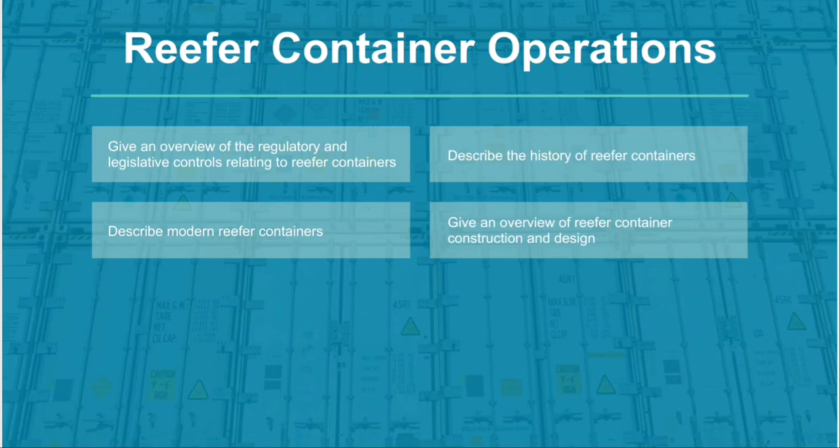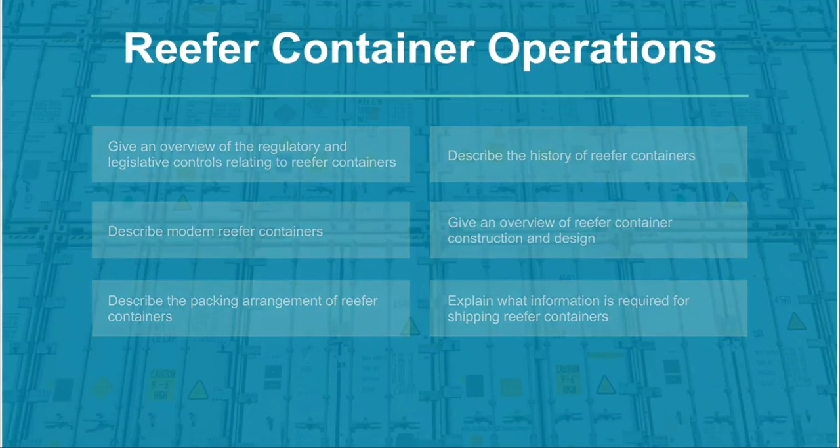This course is designed to give an overview of the regulatory and legislative controls relating to reefer containers, describe the history of reefer containers, describe modern reefer containers, give an overview of reefer container construction and design, describe the packing arrangement of reefer containers, explain what information is required for shipping reefer containers, give an overview of special shipments, describe the pre-acceptance checks, explain how reefer containers should be stowed on board, describe how reefer containers are monitored at sea.

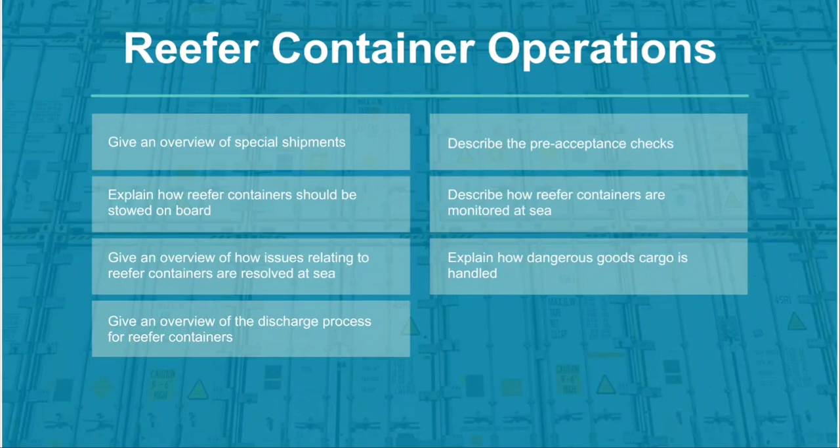Give an overview of how issues relating to reefer containers are resolved at sea, explain how dangerous goods cargo is handled, and give an overview of the discharge process for reefer containers. At the end of this course there is an assessment. These questions are assessed and have a 70% pass mark, so please pay close attention and think carefully about your answers.

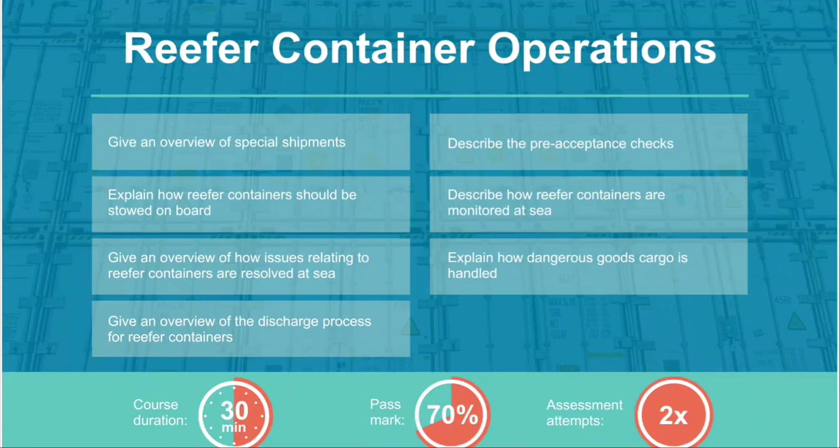Under the Safety of Life at Sea Convention, cargo units, including containers, vehicles, and other movable entities, should be secured on board the ship as per the Cargo Securing Manual, CSM. The CSM was approved by the administration and drawn up to a standard at least equivalent to the relevant guidelines of the International Maritime Organization publication, the Code of Safe Practice for Cargo Stowage and Securing.

In accordance with the International Safety Management Code, each ship should have a procedures manual that details how to safely handle, stow and secure the cargo, including maintenance of equipment, such as reefer plugs and emergency procedures for any fires, pollution or risks from cargo.

The International Maritime Dangerous Goods Code is a detailed set of requirements produced by the IMO covering the transport of packaged dangerous goods by sea. It ensures goods are clearly identifiable, segregated, packaged and transported correctly, and have emergency procedures in case of spillages, fire and medical incidents. Delegates on this course should make themselves familiar with all company procedures and operating manuals for carriage, operation, repairs, breakdown, reporting and spares pertaining to the ships and reefers carried.

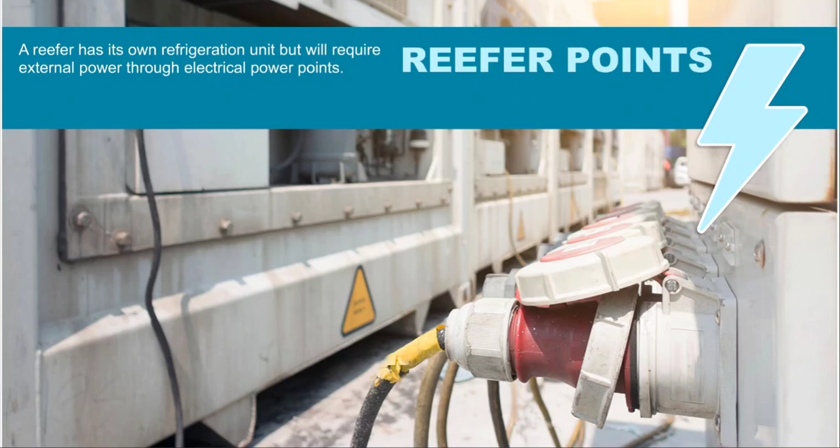A reefer has its own refrigeration unit, but will require external power through electrical power points called reefer points, from a land-based site, a ship or at the quay. During road, rail or trailer transportation, reefers can be powered by transport units or diesel generators.

However, it has not always been easy to transport meat and vegetables. In the early 19th century, ships would use packing ice and salt to ensure that items did not spoil, but it was a difficult task, having to cut ice from frozen lakes in cold areas. As more engineers took an interest in experimenting with long-distance refrigeration and technologies advanced, by the 1960s, insulated container ships were fully developed and cargo units were being shipped worldwide in a standard size that could travel by road or rail.

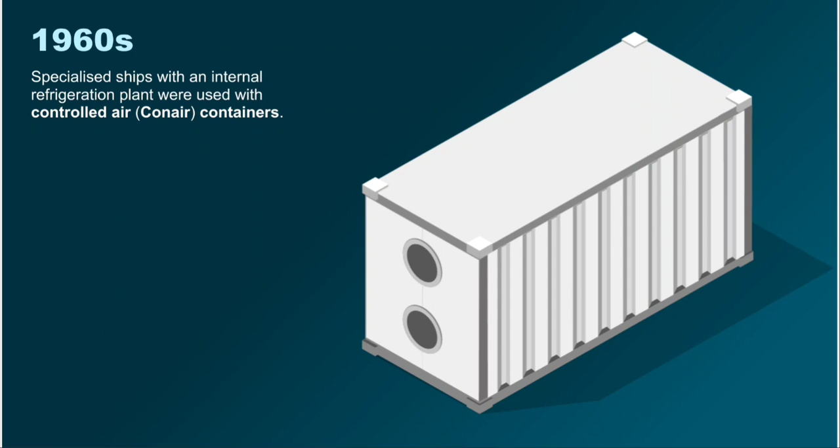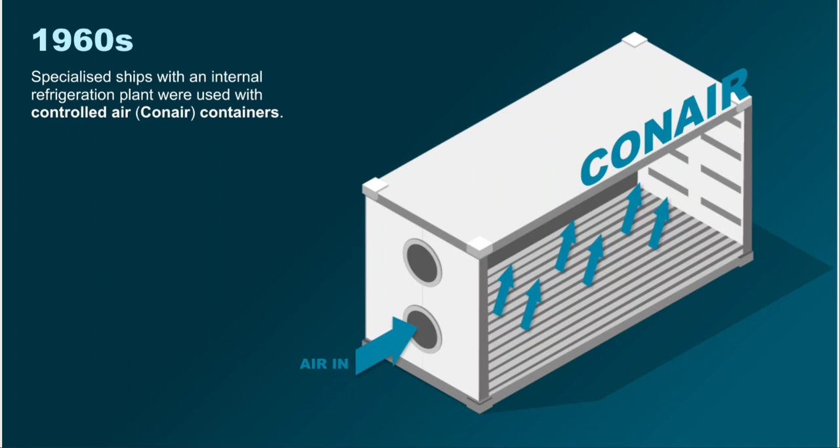In the 1960s, specialized ships with an internal refrigeration plant were used with controlled air, Conair containers stowed under deck so they could be hooked up to the controlled air system. The air within the container was temperature controlled and pumped in through the bottom porthole, circulated around the cargo and then returned via the top porthole for hot air to vent and be recycled again.

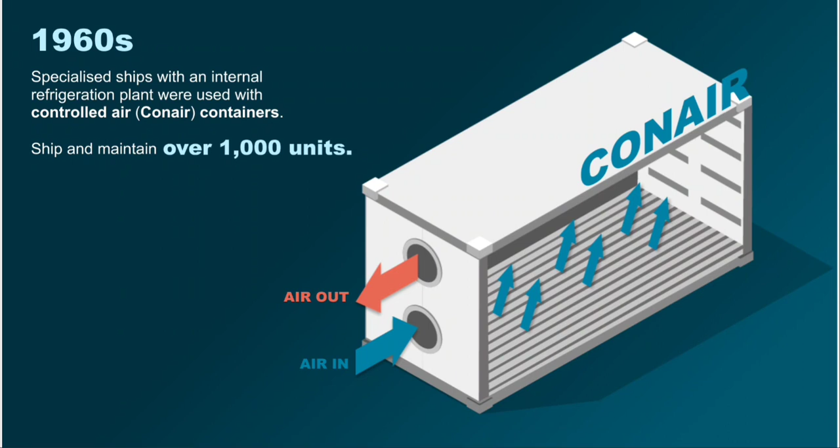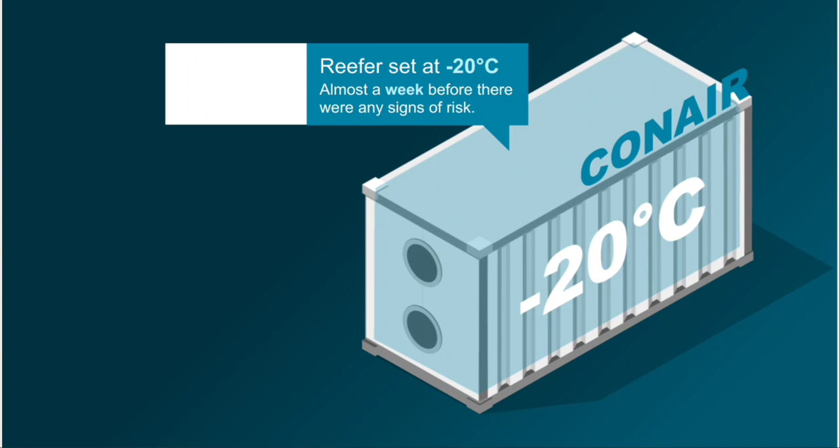Back then, it was possible to ship and maintain the air in over 1,000 units. A designated refrigeration engineer, or a frosty, would look after the plant and monitor the cargo. An advantage of the reefer over an open hold was that a loaded reefer set at -20 degrees Celsius would take almost a week before there were any signs of risk to the contents inside, regardless of the outside temperature, as long as the doors and/or portholes remained closed. Trying to keep an open cargo hold sealed and cooled with a large amount of cargo would perish much quicker.

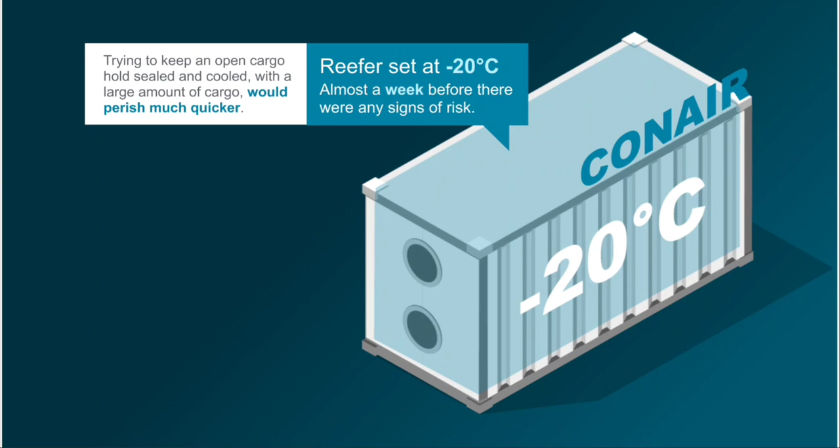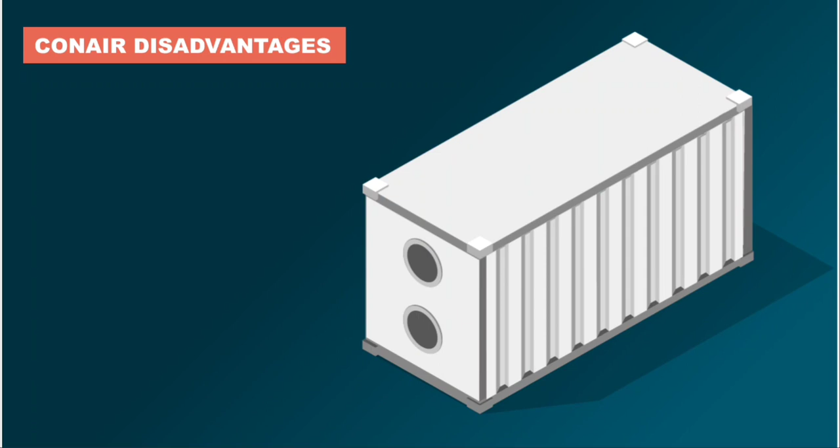On the other hand, there were also some disadvantages with Conair containers. For example, road and rail transport could be difficult as the containers were unable to hook up to a power system like they could on a ship.

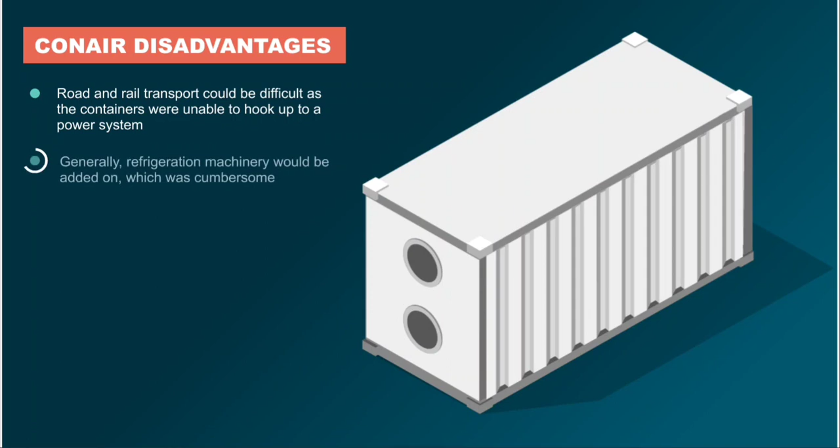Generally, refrigeration machinery would be added on, which was cumbersome and would stick out from the container. The air could not be controlled for each individual container, only in the single stack under deck, which would usually include 8 to 10 containers.

Care had to be taken to couple and uncouple the containers correctly to the holes. In some cases, port operators would mistakenly cause damage by not realizing they were still connected before trying to lift them out, and only 20-foot units were available, which meant limited cargo space for shippers and a higher logistics cost.

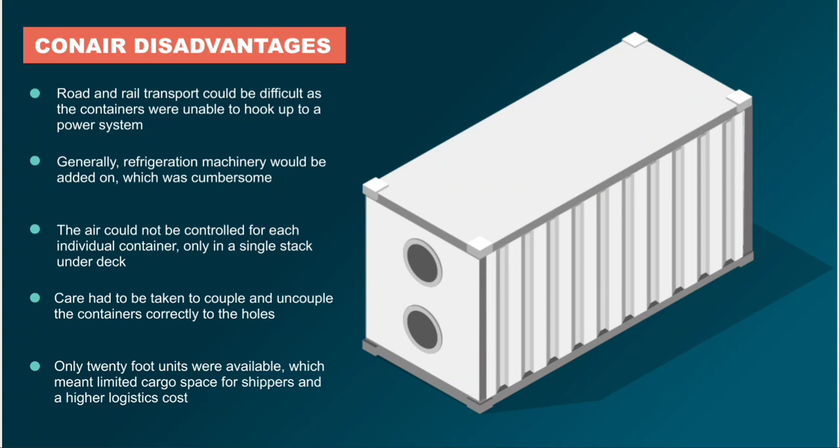By the 1970s, refrigerated containers were built with integrated cooling systems, which were called integral containers or integs, and are still used today. Each unit is operated by electricity that is supplied via a socket from the vessel or vehicle.

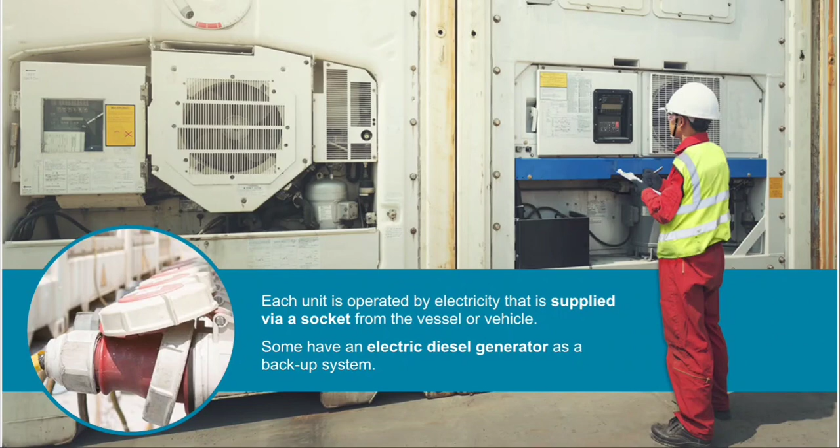Some have an electric diesel generator as a backup system to protect the contents from perishing in the event of power loss. Integs also don't have strict hookup dimensions like the Conair containers, only access points on the transport unit in order to run a cable and plug them in.

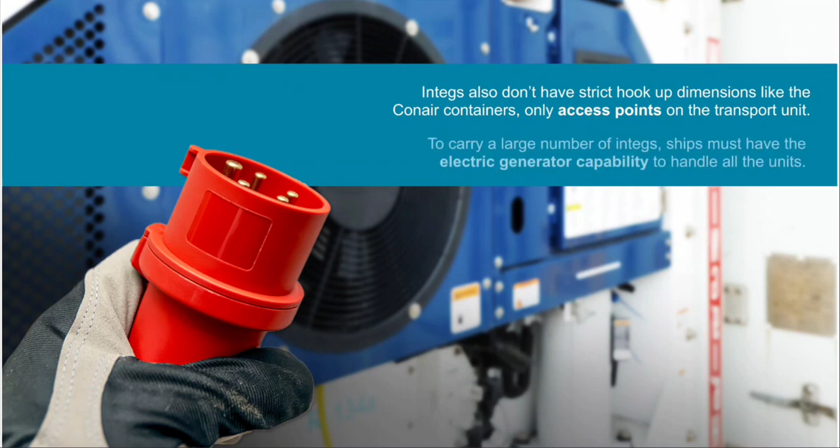To carry a large number of integs, ships must have the electric generator capability to handle all the units. Only a few hundred could be carried, though on modern ships, over 2,000 containers can be transported, on deck as well as under deck.

Disadvantages of integs include: each unit has its own individual refrigeration plant and machinery, which can increase problems as there are numerous plants on board. Each unit must have safe access for plugging and unplugging, monitoring and repairs.

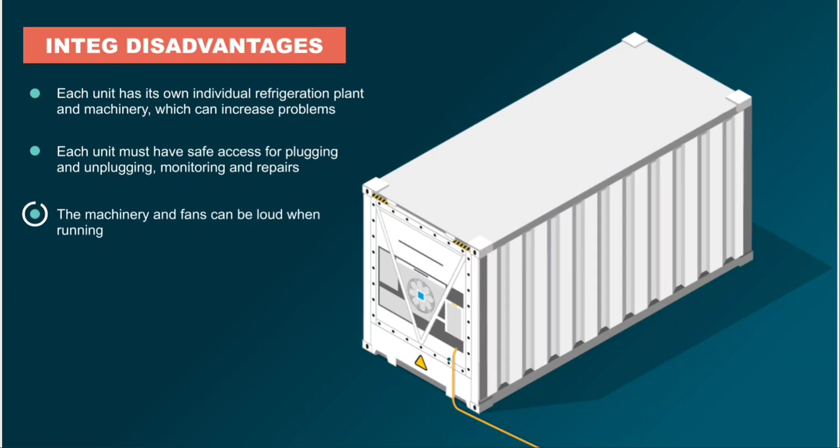The machinery and fans can be loud when running. Integs discharge air and heat. This means that a system of fans and vents is required under the deck to release the air and heat, which can be a hazard.

Large power plants are required on board ships to cope with the number of integs carried, which takes up space, is more costly to install and maintain, consumes more fuel, and therefore increases emissions.

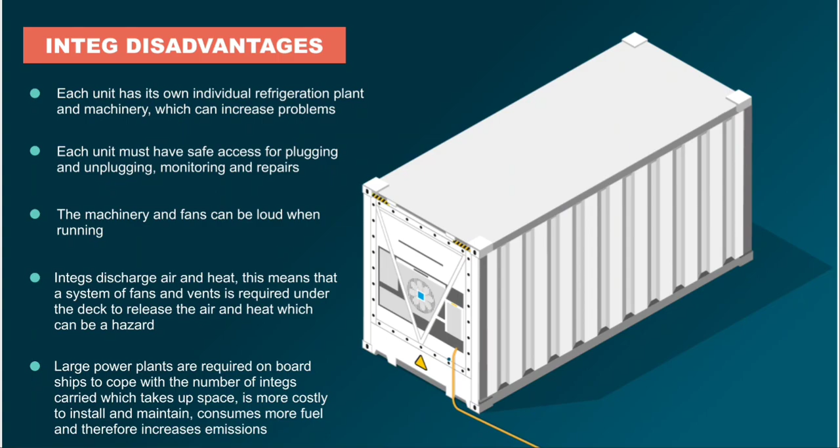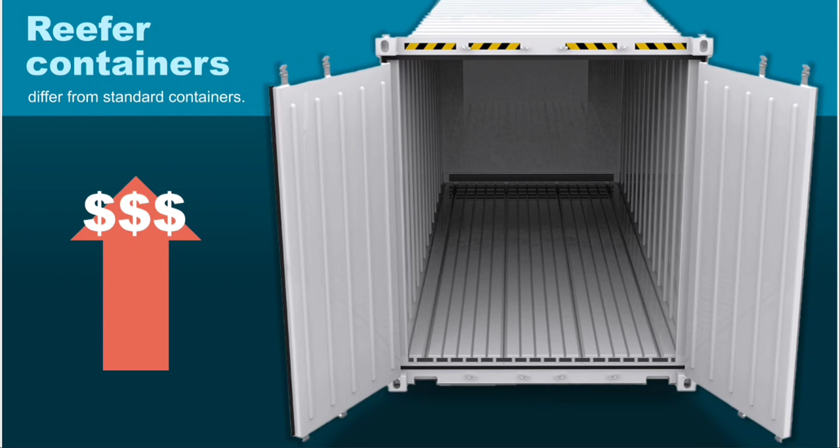Reefer containers differ from standard containers and are more expensive to produce and maintain. Let's take a look at the construction and design of a reefer container.

The polyurethane insulation is 10 to 12 centimeters thick. The temperatures are adjustable between 25 degrees Celsius and -25 degrees Celsius, though some newer types can be set between 35 degrees Celsius and -60 degrees Celsius.

Each unit has a T-grating aluminium floor with an air duct to allow airflow underneath the cargo and has a stainless steel food-grade interior lining. The power connection is 380 to 440 volts at 32 amperes.

The outside color of the container is white to reflect any heat from exterior sources. The containers can be driven by a lift truck or forklift, and the containers have insulated doors and are wind and waterproof to protect from outside conditions.

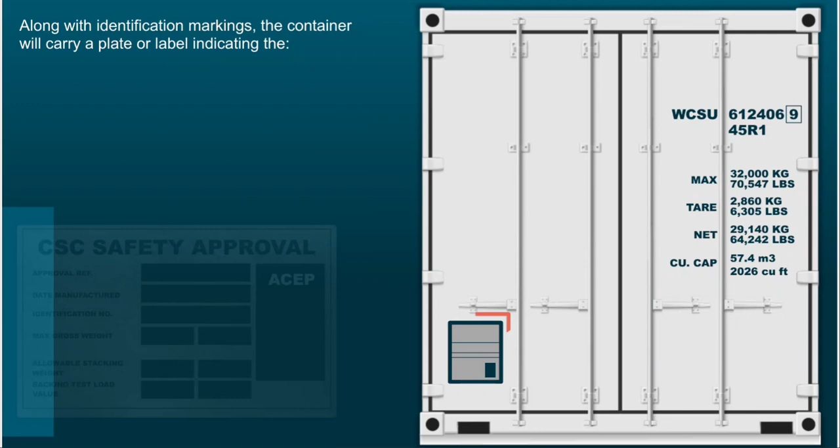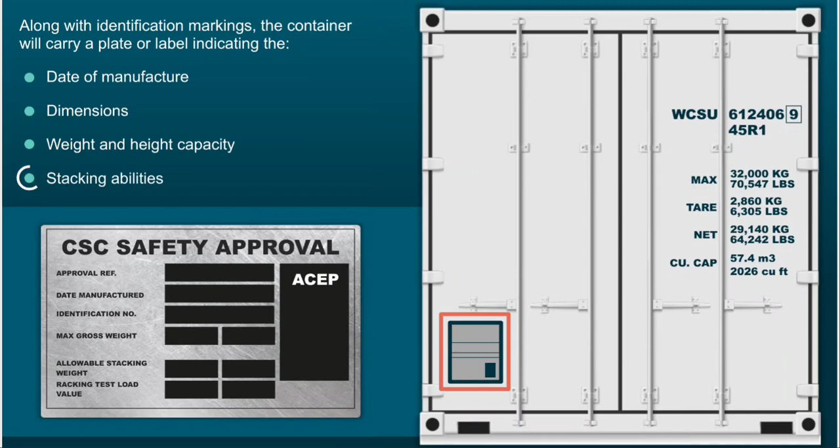Along with identification markings, the container will carry a plate or label indicating the date of manufacture, dimensions, weight and height capacity, and stacking abilities. Also shown is how the container is monitored under the International Convention for Safe Containers and the approved Continuous Examination Program. This ensures the container is always fit for transporting goods and its integrity is maintained to international safety regulations.

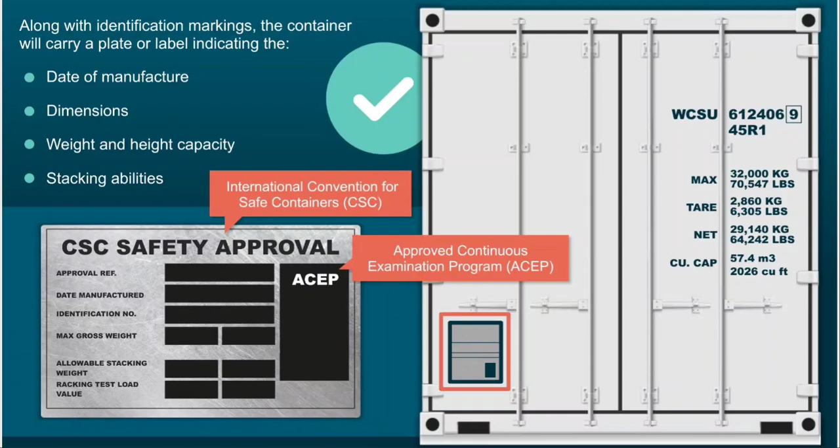The container door security lock seals should be intact on arrival at the final destination. The ship's crew have no involvement in packing the containers. This is done by the shipper of the cargo or their representatives.

When packing, there must be no large gaps between the cargo and the walls or other pieces of cargo. The cargo should be stowed in blocks where possible or secured inside. This will help to ensure that the cargo does not move whilst on passage.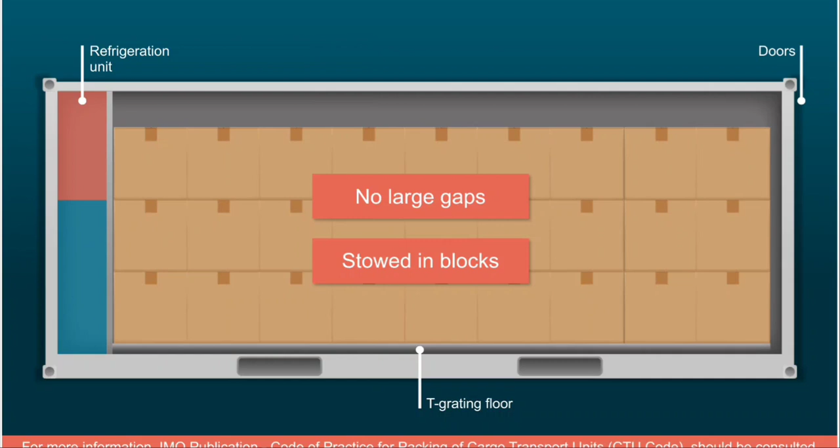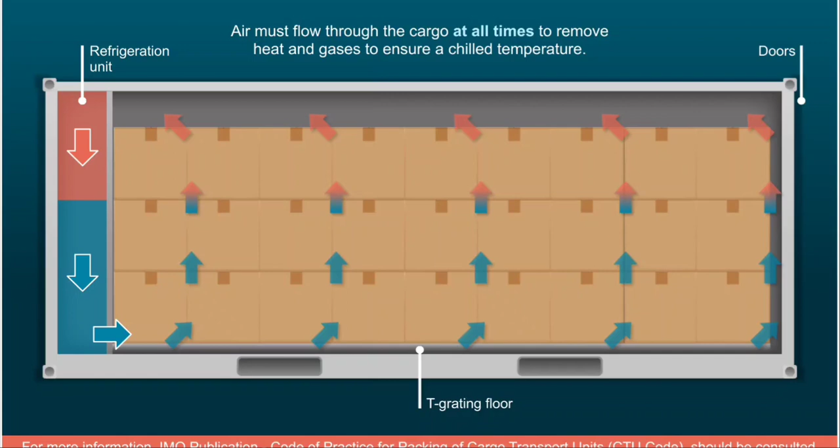Air must flow through the cargo at all times to remove heat and gases to ensure a chilled temperature. Therefore, the transport boxes used should have ventilation. Fresh air ventilation is required for fruits and vegetables, and for frozen goods, air must flow around the cargo at all times.

The ship must be given all the important information about the reefers before loading to ensure that the units are loaded into the correct positions to hook up to power and to provide safe access, and so that empty reefers that don't require power are placed in the right location on board.

As well as the usual loading information for each container, the reefer manifest will be passed on to the ship's crew. The manifest will include important information such as the stowage position, what the container is holding, the set point temperature, information on ventilation, the level of humidity required, and information on how to ripen on the voyage.

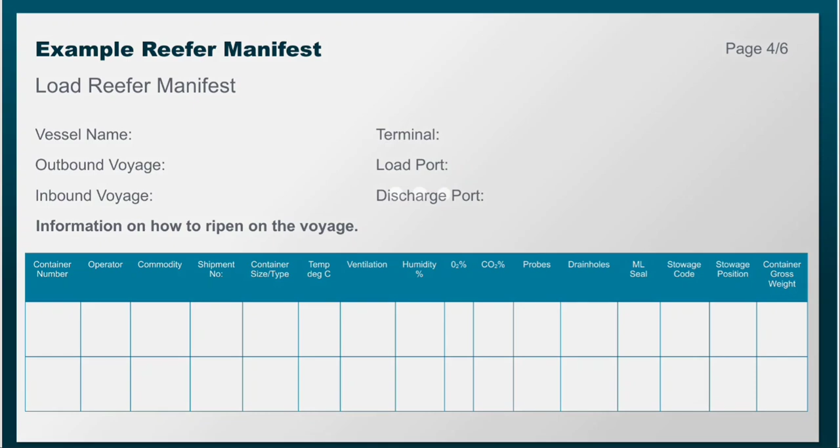Special shipments or high-value reefer cargo must be monitored and maintained on board with greater attention. For example, Häagen-Dazs ice cream can be worth millions of pounds per container, and therefore a loss or damage to such cargo could result in huge insurance claims.

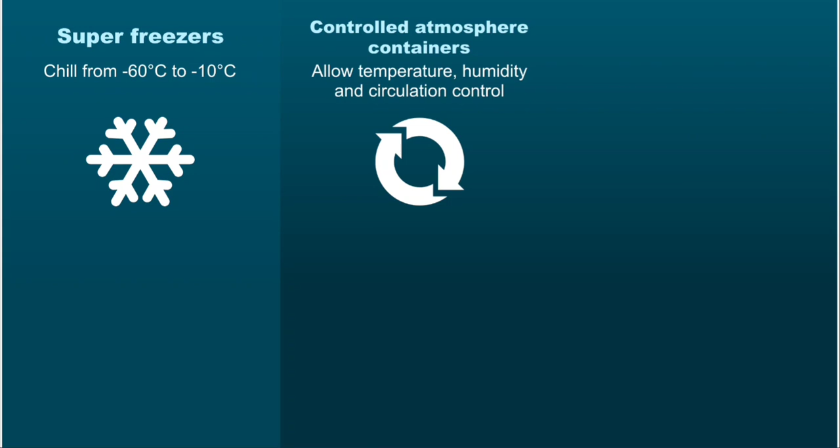These types of special shipments require special containers. For example, superfreezers that chill from -60 degrees Celsius to -10 degrees Celsius, controlled atmosphere containers which allow temperature, humidity and circulation control, and cold treatment containers that keep fruit and vegetables in a healthy state. These containers are generally stowed in specific locations on board for ease of access and removal, if need be. Monitoring and repairing must always be possible by a trained on-board technician. Specific spares and equipment must always be available on board.

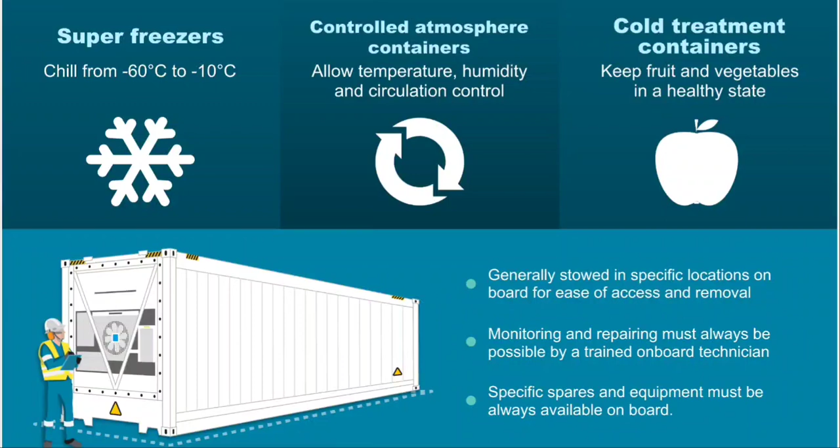Once a reefer container is loaded on board, it should be visually checked. Then it should be plugged into electrical power immediately, especially if the contents should be chilled and the loading port has a hot climate. Visual checks should include the following as a minimum.

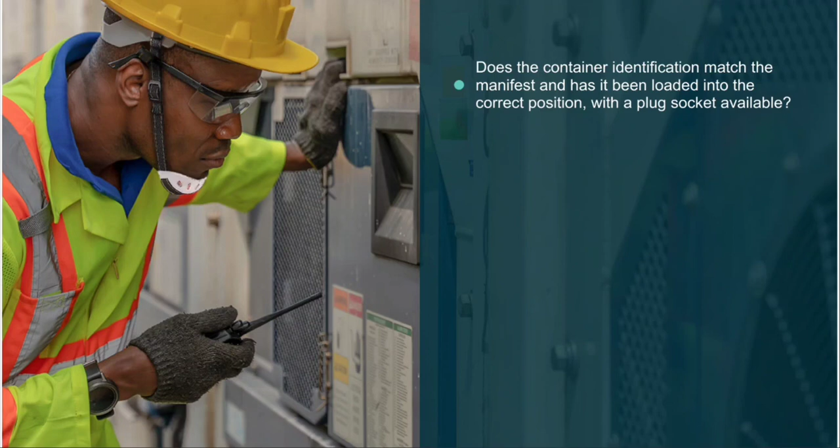Does the container identification match the manifest, and has it been loaded into the correct position with a plug socket available? If on deck, is it secured by the twist locks accordingly? Is there any serious structural damage to the container which may impair the insulation and should be reported? Are the doors, sides and seals intact? Are there any leakages, condensation or strange smells coming from the doors or the refrigeration unit? Is the cable and plug in good condition?

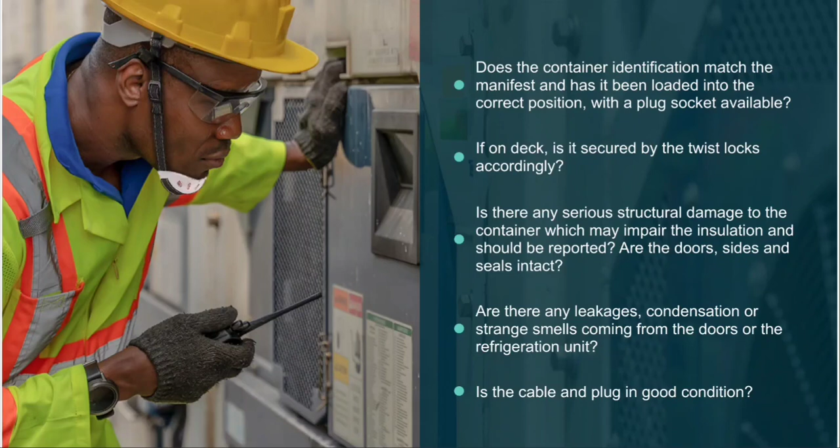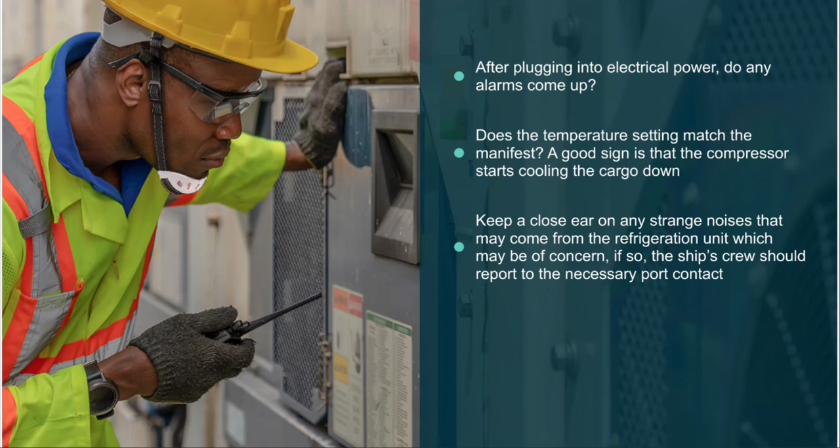After plugging into electrical power, do any alarms come up? Does the temperature setting match the manifest? A good sign is that the compressor starts cooling the cargo down. Keep a close ear on any strange noises that may come from the refrigeration unit which may be of concern. If so, the ship's crew should report to the necessary port contact. Check the ventilation and dehumidification settings, and check the controlled atmosphere and cold treatment settings if applicable.

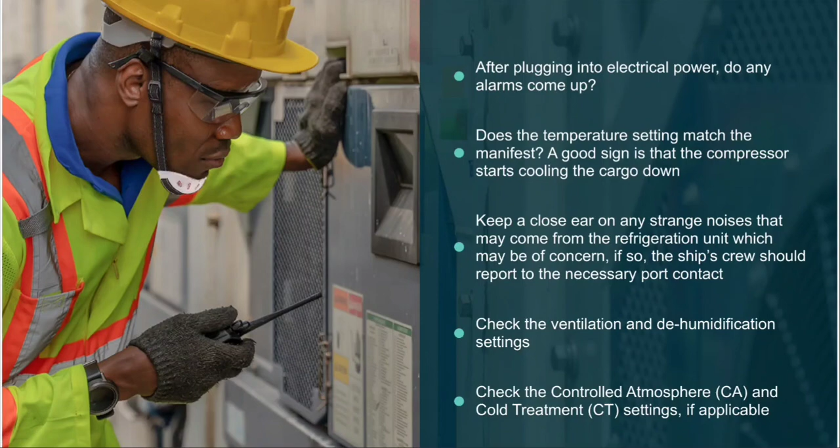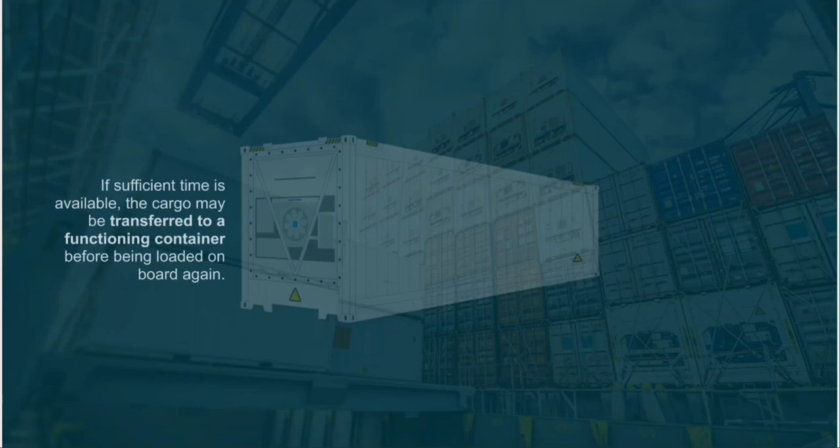Whilst in port, if there are any concerns with reefer containers, this should be reported to the necessary port contact immediately so that a reefer engineer can inspect. If this cannot be done, the container should be removed in order to be repaired on shore. If sufficient time is available, the cargo may be transferred to a functioning container before being loaded on board again.

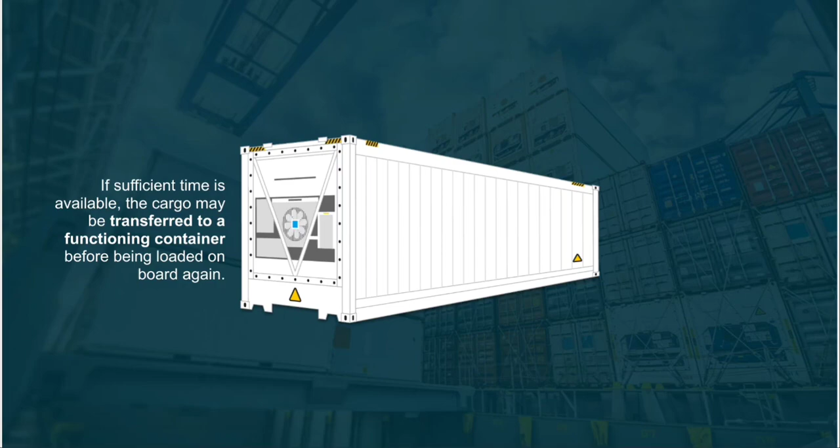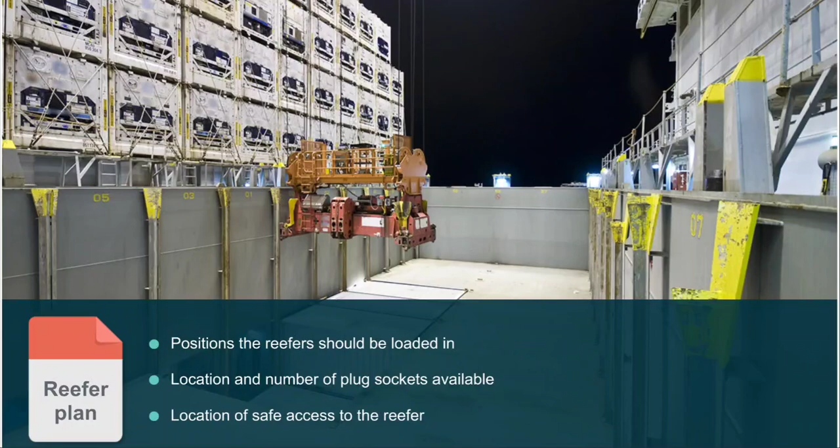Every ship will have a reefer plan showing the positions the reefers should be loaded in, location and number of plug sockets available, and location of safe access to the reefer. Generally, the reefers are loaded on board with the refrigeration machinery facing aft, or towards the back of the ship. This ensures an extra level of protection from the sea and weather, which generally comes from ahead. It also allows any water or condensation to run aft, as this is where the ship drains and bilges are located.

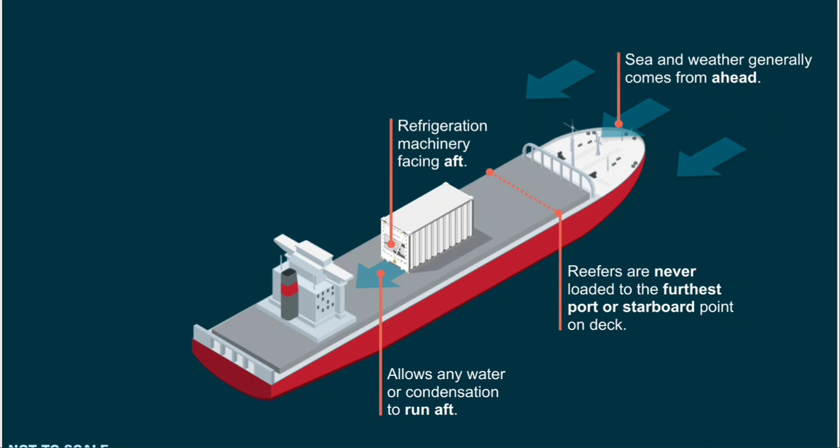The reefers are never loaded to the furthest port or starboard point on deck, as this is too near the ship's side, and therefore puts anyone plugging or unplugging, monitoring or repairing the reefers at risk of falling over the side. On roll-on, roll-off ro-ro ships, the containers will sit on a lorry but are plugged into the ship supply whilst the ship is at sea.

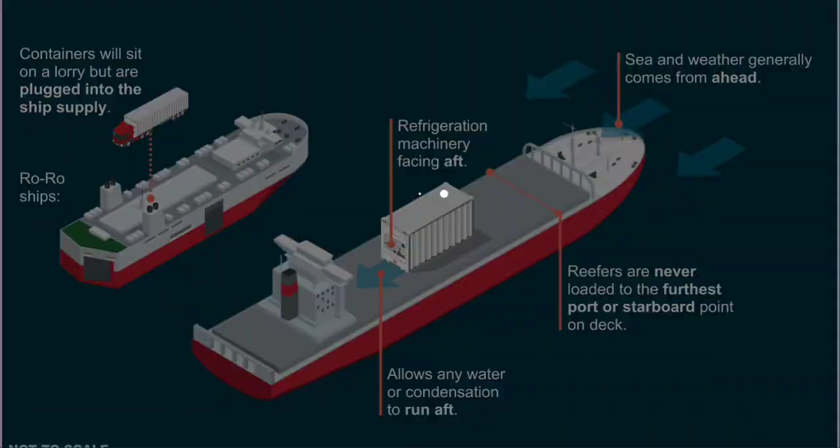Reefer containers can be used to carry dangerous goods under strict conditions. Due to the heat given off by the reefer motors, other containers with dangerous goods inside should not be stored nearby. The heat from the motor could increase the risk of fire, which could result in an even greater risk if it should affect the dangerous good inside.

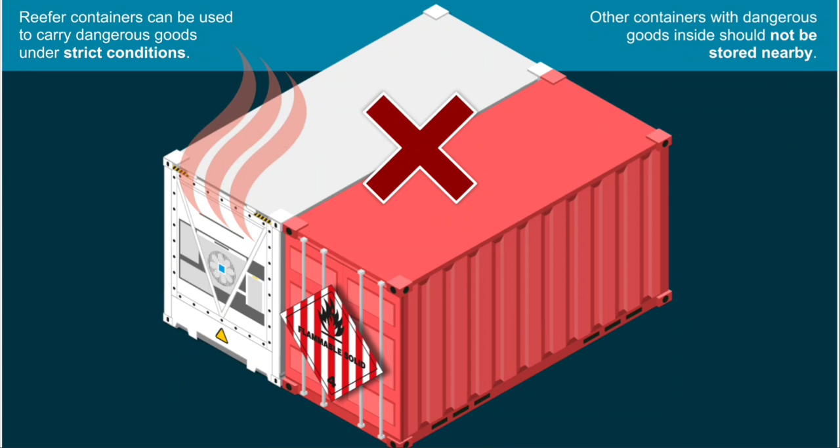If there are two containers with dangerous goods inside that may pose a problem if they were to interact, the containers must be stowed at a suitable distance from each other, as per the International Maritime Dangerous Goods Code. This does not apply to empty reefers, as the motors would not be running.

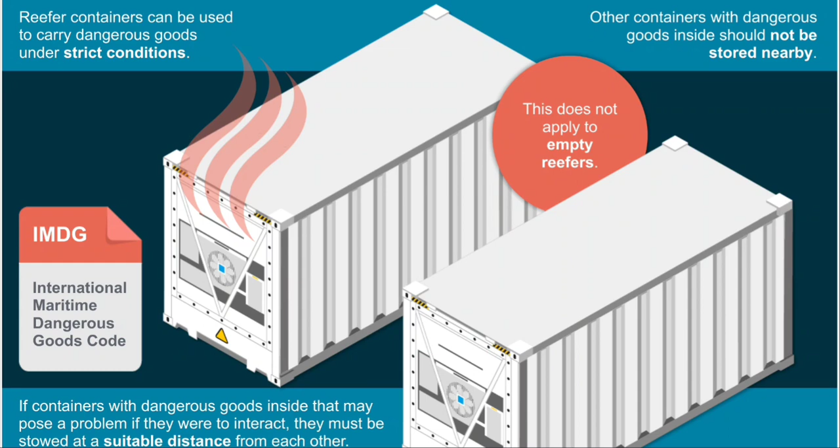Once at sea, the reefer will always be connected to the ship's electrical power and will be continuously monitored by technology via an onboard computer, including alarm presets to warn of any issues, for example if the supply or return temperatures were to get out of range on the reefer panel.

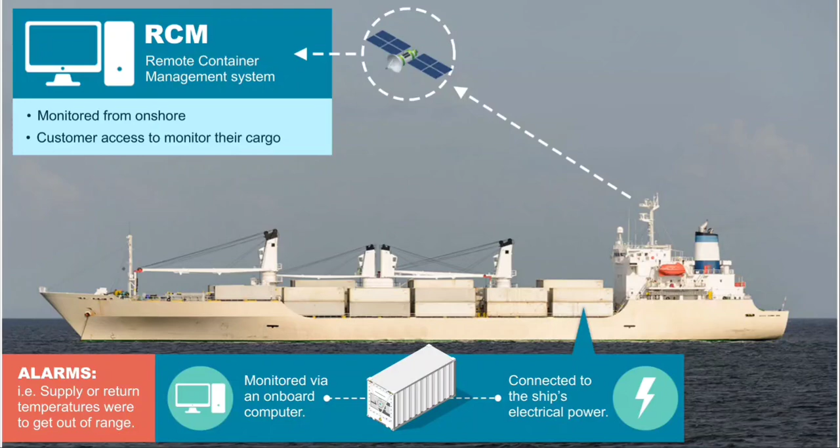Most operators have a remote container management (RCM) system, which is a constant monitoring system on board. The RCM can be monitored from onshore and can be set up to allow customer access to monitor their cargo if required. However, most companies still require a visual check of all reefers on board once or twice per day to ensure there are no visual or mechanical concerns.

The visual checks are recorded in a log. Checks may increase up to 4 times a day for high-value cargo.

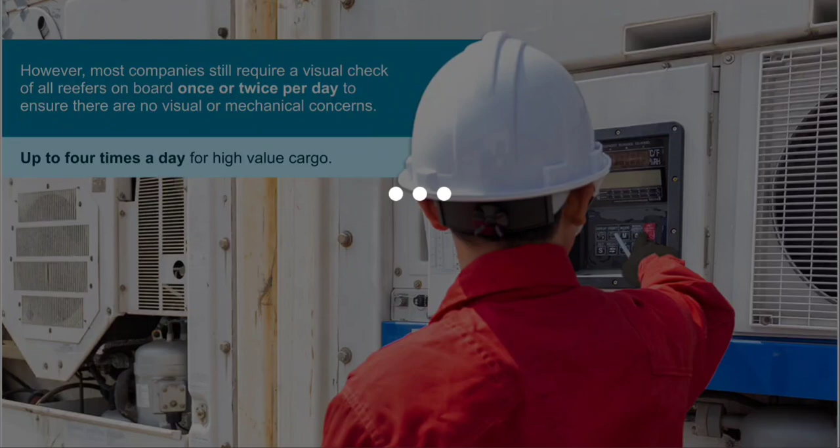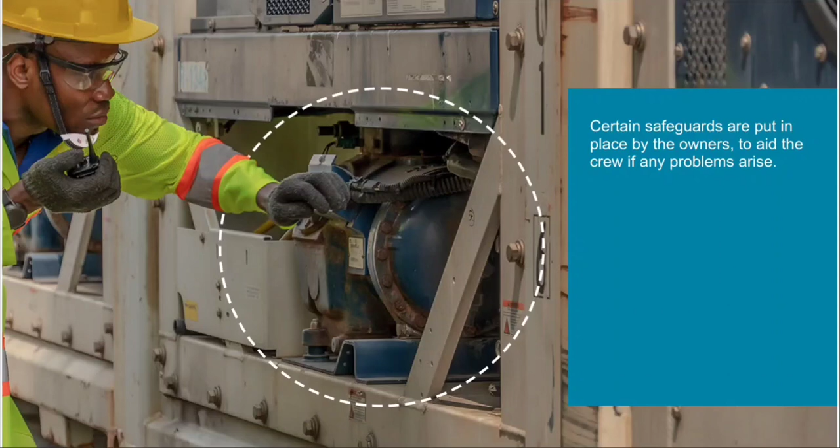Due to the high value of cargo involved in the carriage of reefers, certain safeguards are put in place by the owners to aid the crew if any problems arise. If the ship is many days from the next port and there is an issue with the reefer, personnel will do what they can to keep the reefer running and to stop the cargo from perishing. If the cargo is hard frozen, more time is available to fix the issue due to the container being well insulated. If the ship is near the next port, the reefer can be repaired on shore.

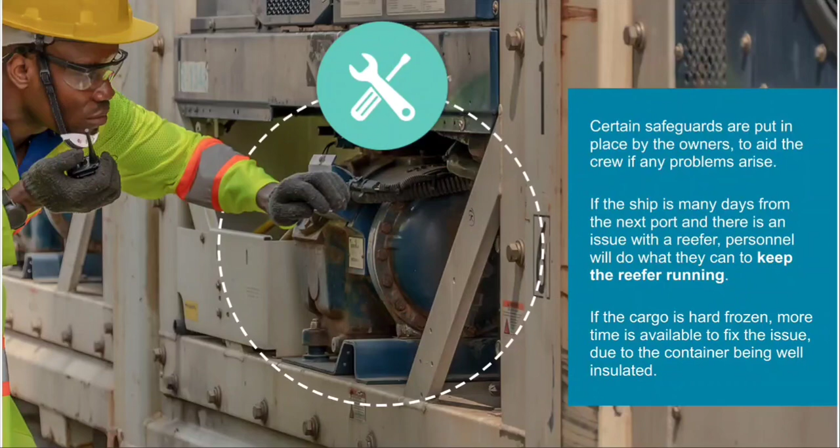Not all reefers are easy to repair by the ship's personnel. However, the owners or operators will ensure that there is always a supply of critical reefer parts on board, aligned to the makes and models carried.

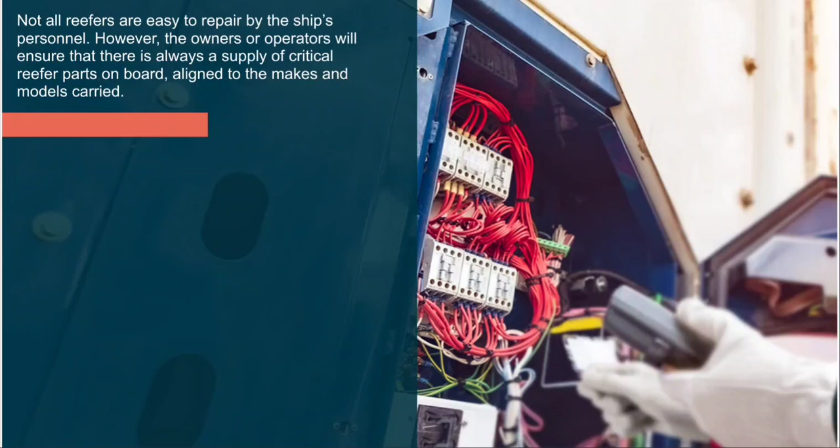Critical spares may include spare refrigerant gas, compressors and oil, circuit boards and electrical parts, spare cables and sockets, evaporator and condenser fans, switches and valves, sensors, pipes, gaskets, and connections.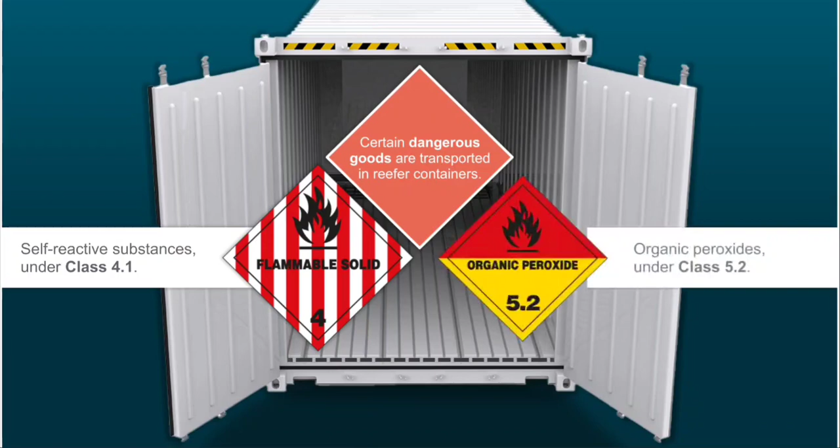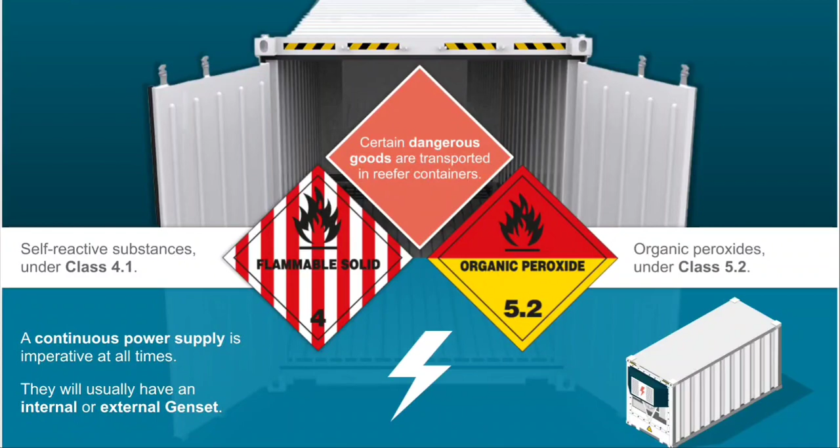Due to safety reasons, certain dangerous goods are transported in reefer containers as they can be volatile if not temperature controlled. Examples of this type of dangerous goods cargo are self-reactive substances under Class 4.1 and organic peroxides under Class 5.2. For these reefers, a continuous power supply is imperative at all times, and therefore they will usually have an internal or external genset, which is a piece of portable equipment consisting of an engine and an alternator or electric generator or other means as necessary.

There are also some types of dangerous goods cargo which are not volatile, though are carried in reefers for commercial reasons to maintain the product quality, such as perfumes and batteries.

Stowage must be aligned to the requirements of the International Maritime Dangerous Goods Code, including the markings, the manifest, segregation from other dangerous goods and reefers, and having the correct firefighting and medical requirements on board.

Let's try an activity to check your understanding so far. Drag and drop the correct word or term into each of the blank spaces to complete the following sentence. When you're happy with your answers, select the Submit button.

Well done, that's correct.

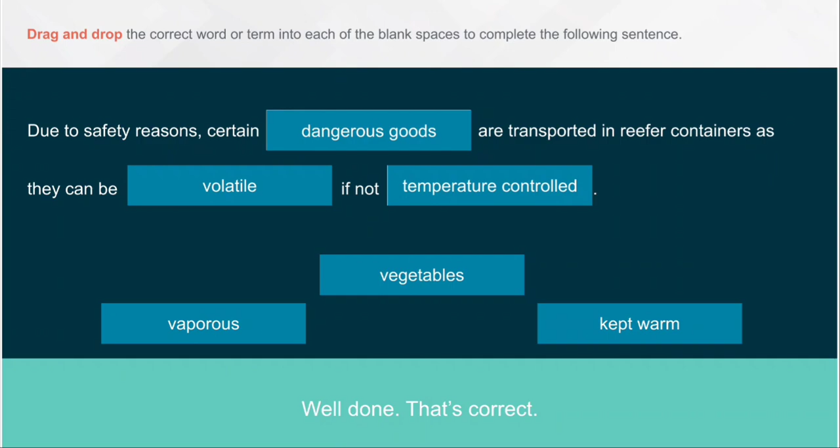Each reefer will remain on board until the discharge port is reached. The planner or company will confirm if there are any changes to this, as some reefers may be transported to other ports on the shipper's request.

Reefers should not be unplugged too soon before unloading, as they may still remain on the ship for some time. Reefers must not be left too late to unplug on board, as damage may occur to the cables and plugs if the containers are unloaded by the cranes and lifted on shore before unplugging. Therefore, close liaison with the port workers on board is necessary.

Well done, you have almost completed this course. You should now be able to give an overview of the regulatory and legislative controls relating to reefer containers.

Describe the history of reefer containers. Describe modern reefer containers. Give an overview of reefer container construction and design. Describe the packing arrangement of reefer containers. Explain what information is required for shipping reefer containers. Give an overview of special shipments.

Describe the pre-acceptance checks. Explain how reefer containers should be stowed on board. Describe how reefer containers are monitored at sea.